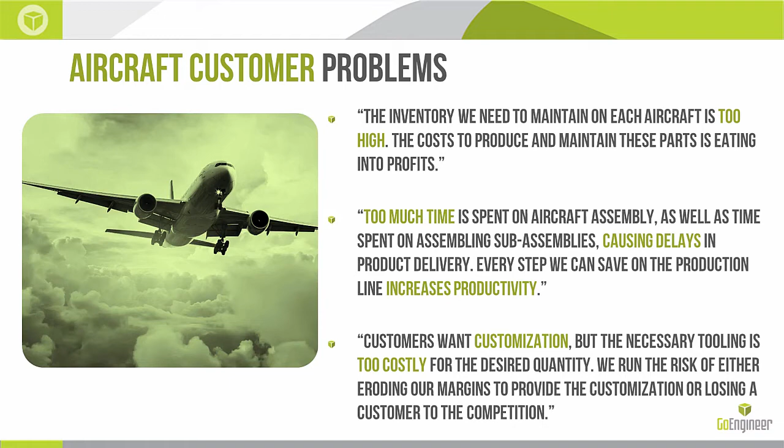So how does AM, or additively manufactured parts, and in particular Stratasys, come into this equation as a solution? What do they offer? In regards to the first demand, the inventory, we can 3D print parts on demand and maintain a digital inventory rather than a physical inventory. Your warehouse costs are going to go down and your part delivery time can actually go down.

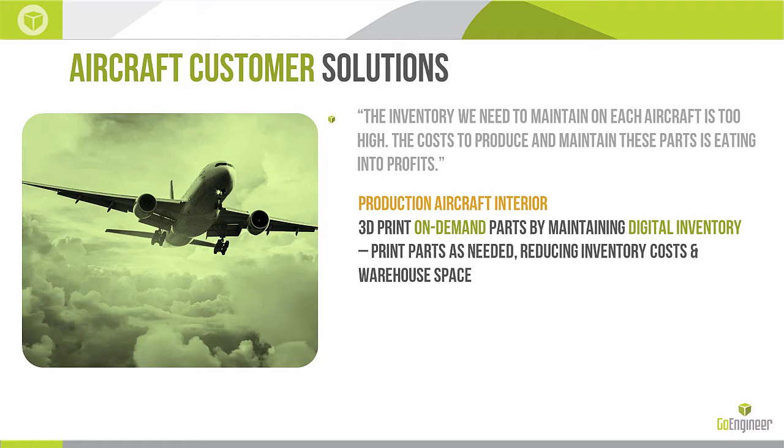In regard to the second demand, spending too much time on aircraft assembly, as I mentioned, if we can lightweight parts and consolidate parts, we can reduce the amount of assembly actually happening. We can reduce the chance for misassembly. And we can reduce the bill of materials. Consolidation is one of the most important aspects of additively manufactured parts.

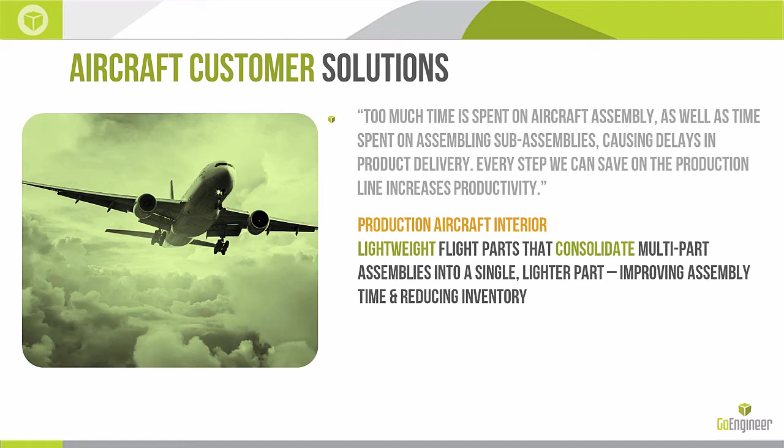With 3D printing, we encourage single part complexity. With conventional manufacturing methods, we have to reduce the complexity of every individual part in the manufacturing phase. And then we assemble them together, either through fasteners or welding or adhesives. Well, with additively manufactured parts, we encourage part complexity within our manufacturing process. The more complex the part is, the more efficient 3D printing becomes.

And lastly, the need for customization. When it comes to interiors and personalization, branding, customers will be able to enhance the in-flight cabin experience, really make a unique experience for their users and their customers. Bringing on additively manufactured parts reduces the cost, reduces the tooling, and reduces the time to actually get into customization.

One important thing to keep in mind here is that aircraft production parts have to be produced with a process that provides extreme consistency and extreme repeatability. If we are going to create an airworthy part, the first part has to be the exact same as the 100th part off our machine. And that 100th part has to be the exact same as a part we produce 10 years from now.

And the only way that we can guarantee that is by proper maintenance and evaluation of the 3D printer, proper traceability and accountability for our materials, and proper vision or proper protocols in the actual printing process.

When it comes to airworthy parts, whether they're flight critical or non-flight critical, we do require FAA approval for production. The goal of that FAA approval is to verify what we were just talking about, that the manufacturers have established a system that ensures those parts are repeatable and they're conforming to the actual approved design of the part going into service.

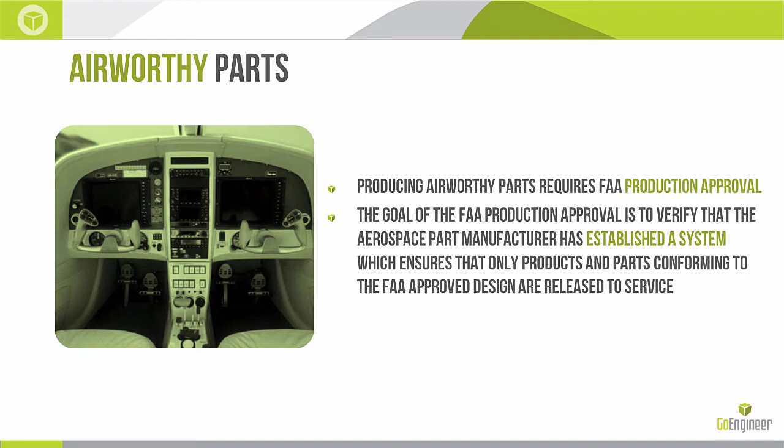So what are the challenges in doing that in regards to additive manufacturing? Well, one of the first challenges that AM part producers face is that they have to create their own material design allowables as a data set, as well as prove to the FAA and confirm consistency and repeatability of their AM process. This is very time-consuming and expensive, and it's circuitous, and it's really an unknown to many people outside of the AM industry and even inside the AM industry.

So Stratasys' solution to this is to actually provide the design allowable data set for the material, ULTEM 9085. They are also going to provide the hardware and the process and the documentation to qualify Stratasys parts off the Fortus 900. This is going to simplify the process of Fortus 900 users in demonstrating equivalency to the original data set.

The second market challenge that AM users face is the current repeatability of our systems. From the difference between system to system and site to site, there's inconsistencies that reduce the applications and the adoption rate of additively manufactured parts in regards to aircraft production. So the Stratasys solution here is based both in hardware and software. They're coming out with a new tip. It's called the T16A tip. They're coming out with updated software with a high quality build mode, which is going to produce more repeatable parts.

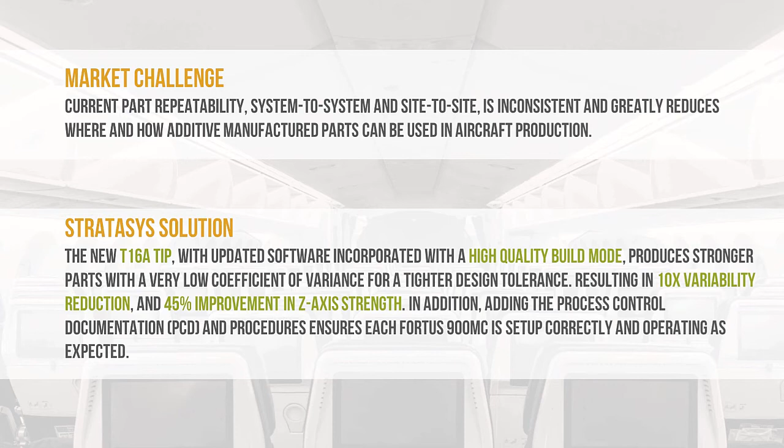We'll have 10 times variability reduction, part to part, system to system, site to site. We're also going to have almost a 50% improvement in Z-axis strength. This means the parts are going to be more isotropic and are going to be easier to qualify for critical and non-critical parts. They're also going to come on site and help set up the Fortus 900 and ensure that it's operating as expected, and also advise users on how to maintain and keep that machine running as expected.

The last challenge that Stratasys is confronting with this aircraft interiors certification solution is the fact that the customers have to create their own procedures and gather all of the documentation required to achieve the certification. Users of the aircraft interior certification solution are actually going to have the documentation and the process control documentation, or PCD, provided to them. Things like material specifications, process specifications, and even CMB print files are going to be provided. That's going to save time and money when it comes to actually implementing a process and pursuing AM parts for flight.

So really the goal of this certification process is that it's going to act as a pre-certification process that shortens the time to market by simplifying the route to FAA certification. You know, every aerospace production part requires full part traceability. And historically, this has been very difficult to provide, especially with some of the consumables like the tips. It just didn't exist. So within this solution, there are going to be changes made to that, and there are going to be other options made available.

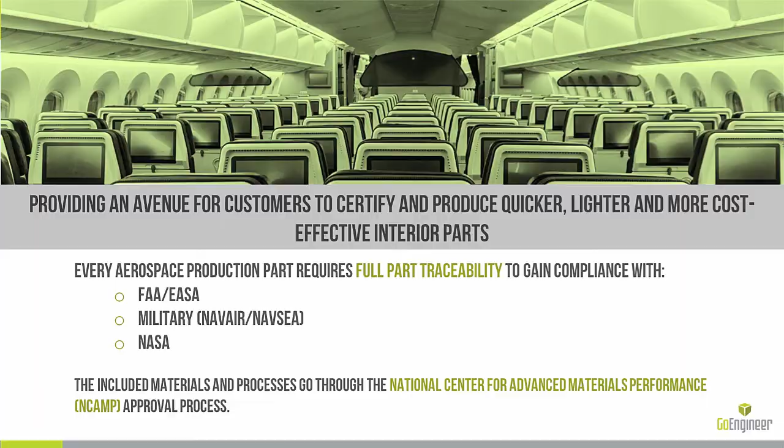So let's talk a little bit about exactly what this aircraft interiors certification solution actually entails. There's 4 parts to this solution. The first part is Stratasys on-site qualification support. This is going to be a key component to quickly and effectively qualifying the actual machine, the Fortus 900. The second component is maintaining the Fortus 900 and the material, ULTEM 9085, and also consumables like the tips. The third leg of this solution revolves around documentation and B-basis design allowable datasets. All of the necessary documentation to apply for certification. There's going to be a little bit of hand-holding from Stratasys to help you navigate the certification process for an additively manufactured part.

And then the last component of this is another hardware component. They're calling it the equivalency toolkit. It's essentially measuring devices to verify and maintain the Fortus 900 for certification. So we're going to go into each one of these a little bit deeper here.

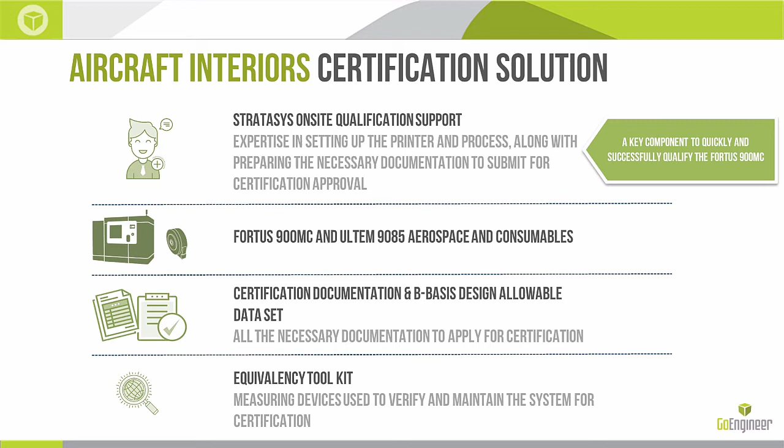The Stratasys on-site qualification support, as I mentioned, this is going to be key in getting your machine up and running properly. It's going to include 3 days of Stratasys on-site support. They're going to be completing the PCD documentation line by line with the customer. They're going to validate the initial system setup, operation, and calibration. And they're going to train the customer on the process for ongoing system checks.

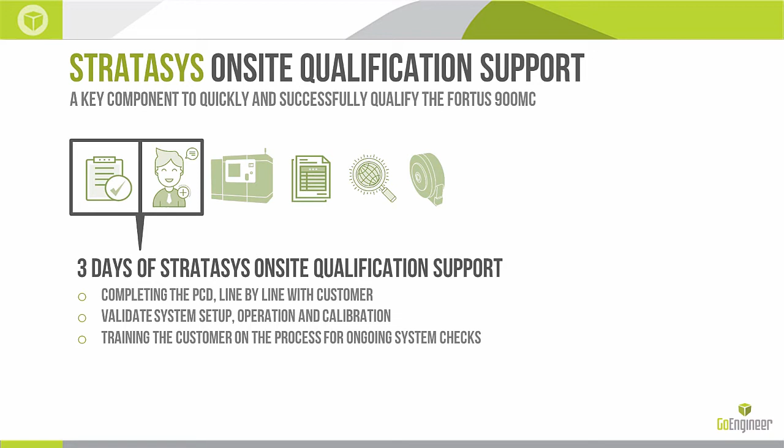The second component, the B-basis design allowables dataset. This is in regards to the Fortus 900 and the material, the ULTEM 9085. With an approved certified process, products designed using the B-basis design allowable dataset for ULTEM on a qualified Fortus 900 will be capable of producing parts for certified aircraft applications. Up until now, no public additive manufacturing B-basis design allowable dataset has actually been created. So an industry group chartered by America Makes selected 9085 as the appropriate material to produce and implement and pursue wide acceptance of additive manufacturing in the aerospace community.

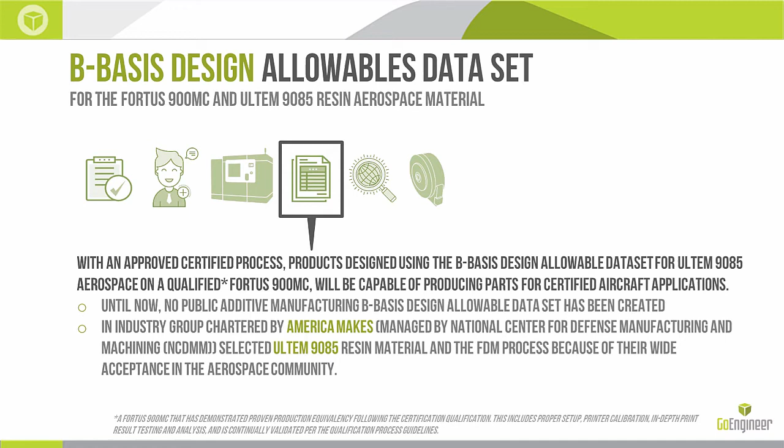Let's talk a little bit about ULTEM 9085. ULTEM 9085 was launched in 2015. We do have a traceable version of this material. It comes in the natural color only. The black version of this is not traceable. Traceability of both the lot and the batch comes from the manufacturer, which is SABIC. The material itself is strong, lightweight, and flame retardant. It's widely used in aircraft interiors today.

The material has a V0 rating for flame, smoke, and toxicity. It's a certified material that's qualified against a controlled specification to ensure consistency of quality and material properties on the part level. This material in particular is available on the Fortus 900, the Fortus 450, and the older Fortus 400 machines. It's used throughout the aerospace industry already by companies like Boeing, Lockheed Martin, Airbus, ULA, Embraer, etc.

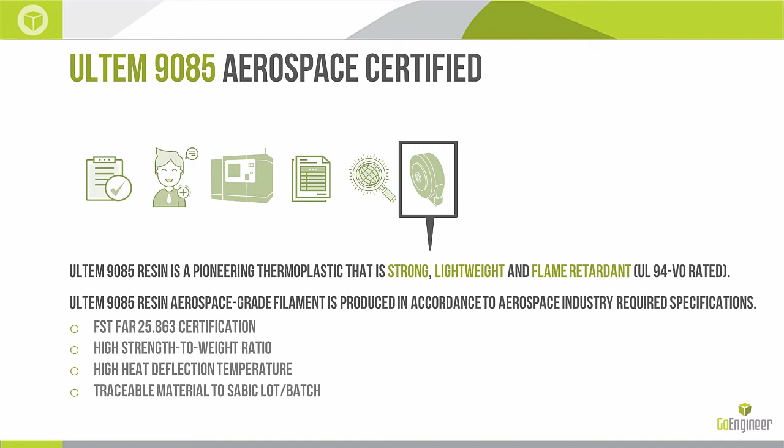Let's talk a little bit about the Fortus 900. The Fortus 900 has been the flagship FDM machine now for quite a while. It has several different materials depending on what your goal is. For end use aircraft parts, we're looking at ULTEM 9085. But it also prints in PLA for concept modeling, and in materials like ASA and PCABS for high-end prototypes. It's easy to use and doesn't require a dedicated operator.

It uses our new GrabCAD print software, which requires nearly zero training, has an excellent interface, and is just simple to use. It has automated calibrations, it's Wi-Fi ready, USB enabled, and has remote monitoring built in. The new version has high-speed mode and draft mode, which is two times the speed of some of the older machines.

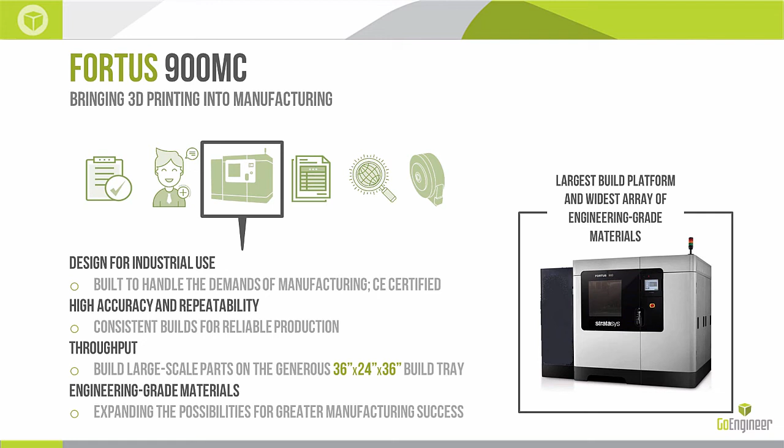In terms of performance, part repeatability, accuracy, and machine reliability, it's unrivaled in the additive manufacturing world. And it is the clear choice for end-use FAA certified airworthy parts.

Now with the Fortus 900, the way it operates, it uses consumable tips. These tips last anywhere from 1,500 to 2,000 hours of print time, and then they're replaced. This has been a pain point for customers pursuing FAA certification for their part production. Historically, these tips have not been traceable.

Well, that is ending with the T16A tip. There are some physical changes to this tip that make it unique, and there are also some process changes. With this tip, we're going to have a much lower coefficient of variance, especially when used with the high quality build mode that's default for this tip. So it's more repeatable. We also have traceability, which is controlled for production use.

This tip is only going to be available for Fortus 900 customers, and it will only be used with the ULTEM 9085 material.

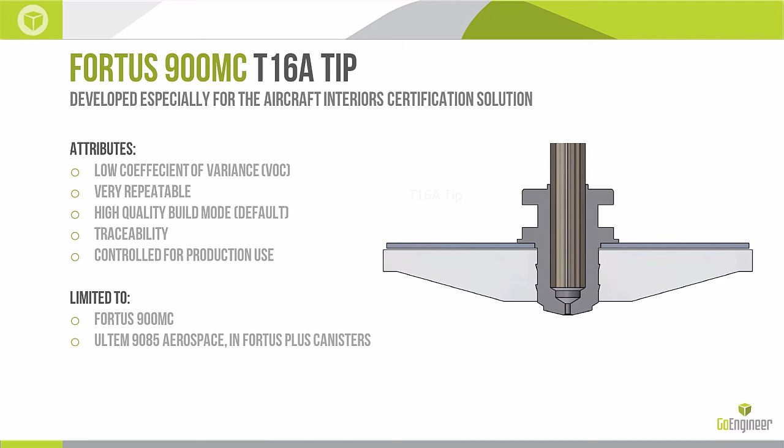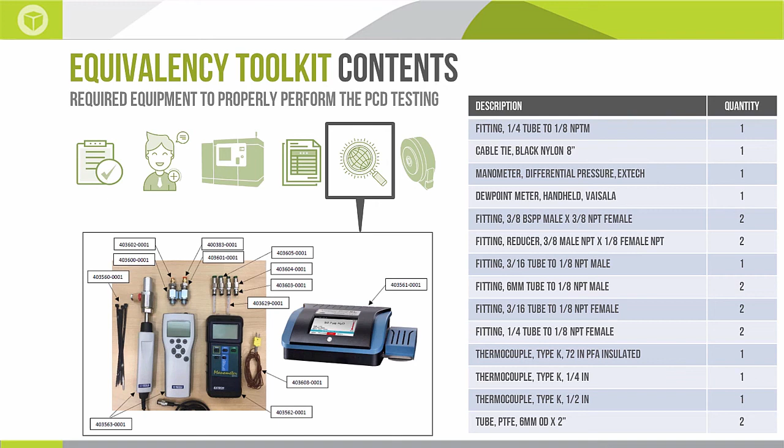One of the last components of this certification solution is the equivalency toolkit. As I mentioned, it's going to be required that the machine operator verifies and maintains that the machine is operating as expected. That's going to require some measurements and some special tools. These are those tools and the guidelines for taking those measurements. So the customer or user does not have to go out and buy and assemble this toolkit. It's just built in and provided right away as soon as you sign up for this aircraft interior certification solution.

So where does this certification solution fit in the steps to actual manufactured certified aircraft parts? As I mentioned in the beginning, it really is a pre-certification process meant to ease the actual certification process. We have several steps here. The Stratasys solution is the first step. It's helping develop the aircraft part production process, with Stratasys coming onsite helping qualify the actual machine, providing the qualification documentation and the toolkit to continue verifying and maintaining the machine, and providing the machine and material.

Once the user is up to that point, they're actually going to start printing and testing coupons to validate and prove equivalency of their parts. After validation, the AM production process is going to be ready for submission to the FAA for certification.

Once that certification process happens, then we're going into production. This is where continued maintenance and evaluation of the machine, and provision of certified and traceable materials from Stratasys, comes into play. They're going to be able to support actual production volumes. Once those parts are produced and proven to be equivalent, then they can be installed on the aircraft.

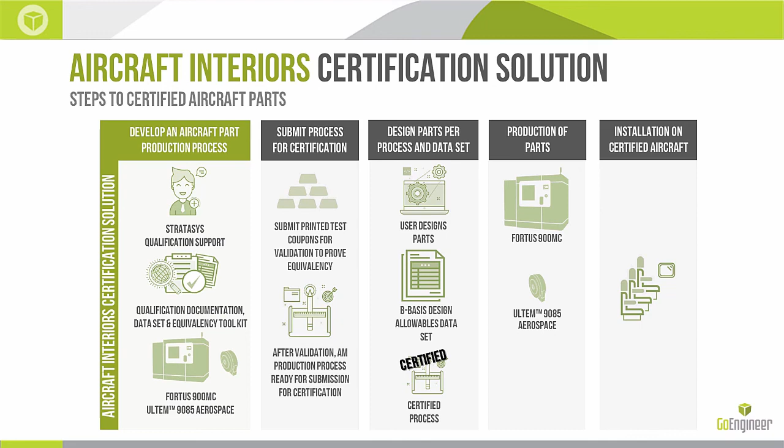So that's a quick overview of that aircraft interiors certification solution. Again, it's a pre-certification process. The goal is to shorten the time to market by easing the way through the FAA certification process, providing everything we can up front so that the actual manufacturer comes into the FAA prepared.